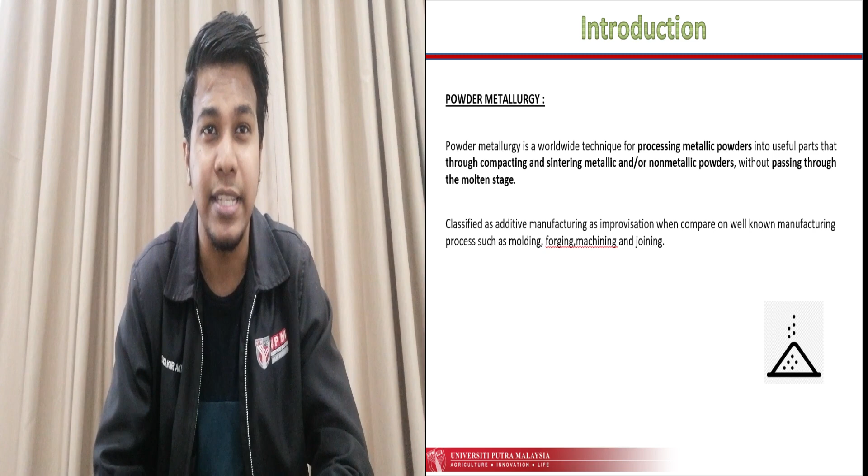Introduction. There are many manufacturing processes in the world, but powder metallurgy is different from others like casting and forging, because powder metallurgy is the processing of metallic powder into a useful piece through compacting and sintering metallic and non-metallic materials without passing through a molten stage. Powder metallurgy is also known as additive manufacturing because it is improvised from other manufacturing processes.

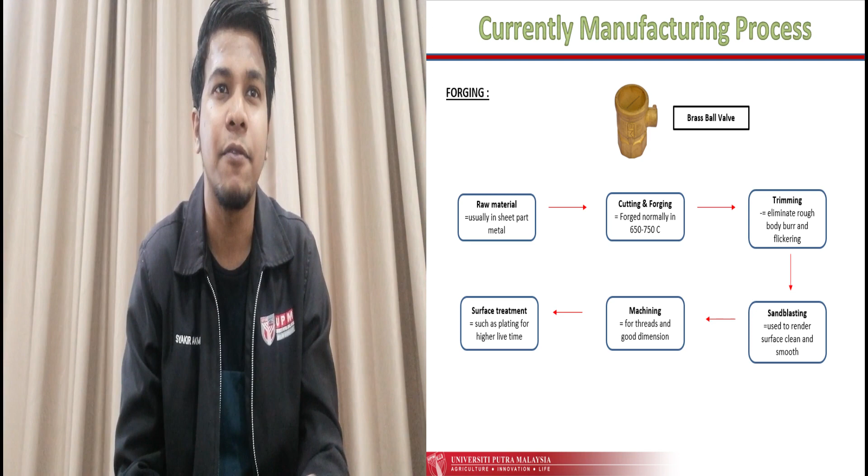Now we go to the current manufacturing process. The figure above shows the brass ball valve. The process used is forging. The first step is raw material, usually in sheet part metal. Then it undergoes cutting and forging at the desired temperature. After that, it undergoes trimming to eliminate body burr and flash. Next, it undergoes sandblasting to smooth the surface. After that, it goes to machining for threading and good dimensions, and lastly surface treatment. Plating is one of the processes for surface treatment for higher lifetime.

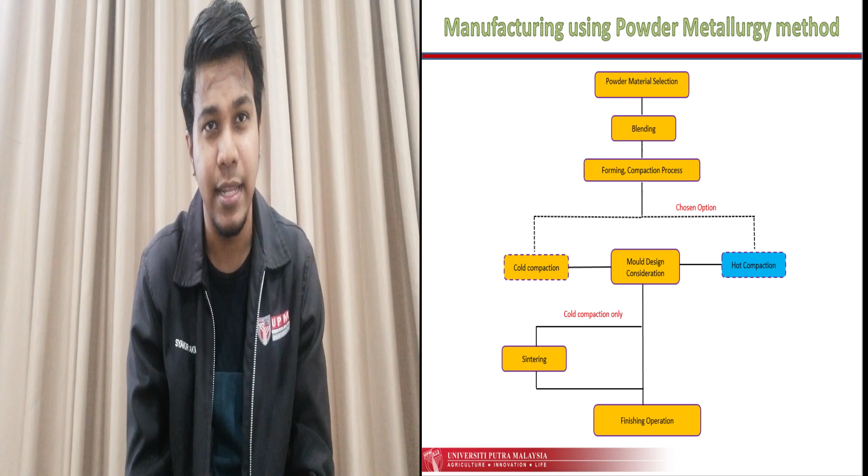Powder material selection. Usually brass alloy consists of copper metal and zinc metal. If we increase the zinc metal, it will lead to increased resistance and ductility. The color will also change from red to yellow, so if it goes more yellow, there is more zinc added.

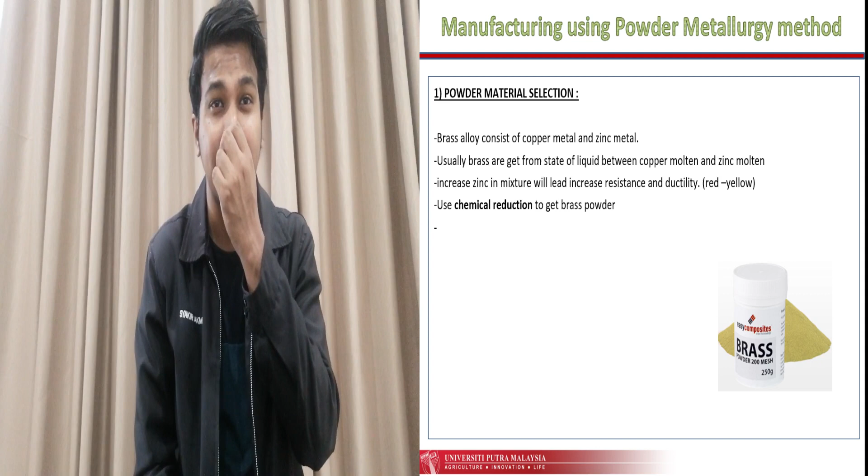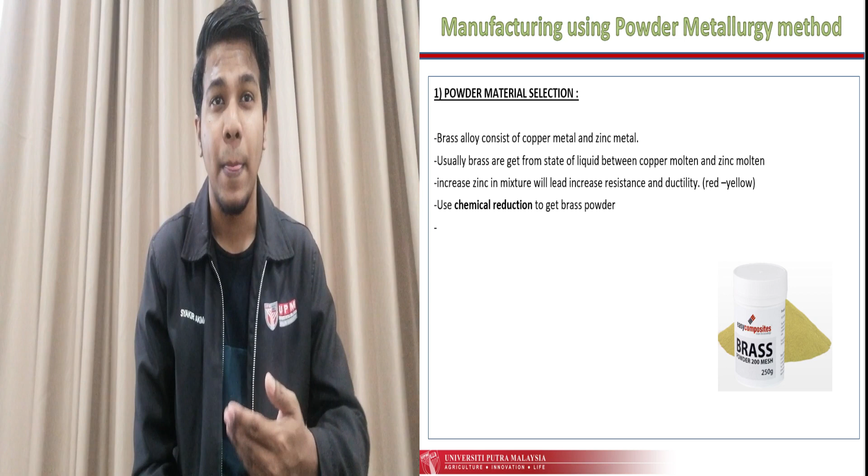Before this, to get the brass, there were additions in liquid state of copper molten and zinc molten, so we get the brass. Nowadays we want to get the brass powder. So to produce brass powder, there are suggestions to undergo chemical reduction to get brass powder. This is the flow of the chemical reduction process.

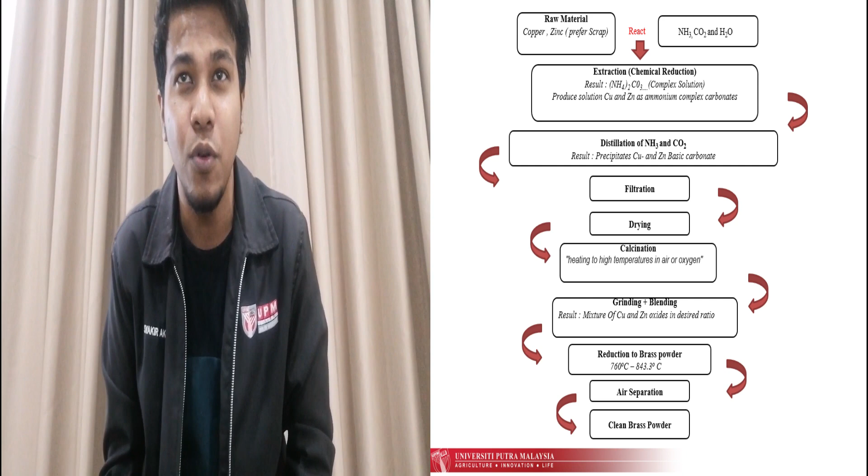Raw material consists of copper and zinc. It reacts with NH3, CO2 and H2O, then undergoes the extraction process. The result is we get (NH4)2CO3 complex solutions. Complex solutions - when we talk about complex solutions, they are the mixture of Cu and Zn in the mixture.

After that, it undergoes the distillation process of NH3 and CO2. The result is we get the precipitate of Cu and Zn. Next, it undergoes filtration, then drying, then calcination. Calcination - the material is heated at high temperature in air or oxygen. After that, undergo grinding and blending, so the result is we get the desired ratio for Cu and Zn.

Next, reduction to brass powder. We heat from 760 degrees Celsius up to 843.3 degrees Celsius - this is the ratio to heat the powder. Then we go to air separation, and lastly we can get the clean brass powder.

Secondly, we move to the blending process. The purpose of the blending process is to make sure the brass powder is in a homogeneous state. I choose the rotating double cone machine because it has a biconical drum, and it also has two functions for the machine.

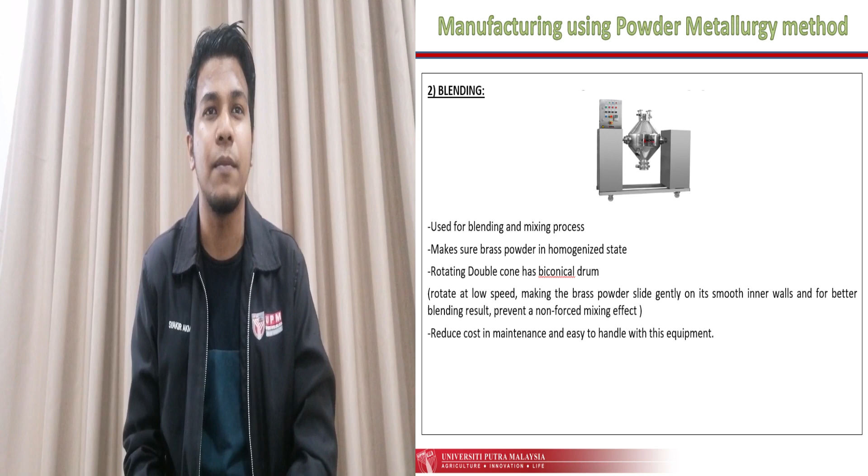It can be a blending and mixing process. The flow of the machine: first it rotates at low speeds, making the brass powder slide gently on its smooth inner walls. This gives better blending results. Another reason I chose this machine is because it can reduce maintenance cost and is easy to handle.

We move to the compaction or forming process. There are many compaction and forming processes such as rolling, extrusion, pressing, and cold isostatic pressing (CIP). For making the brass ball valve, I chose cold isostatic pressing because it helps improve density distribution by reducing friction between the particles and the die.

If I chose just single pressing instead of double active pressing, the result would show non-uniform density distribution, so the final product would not have enough strength.

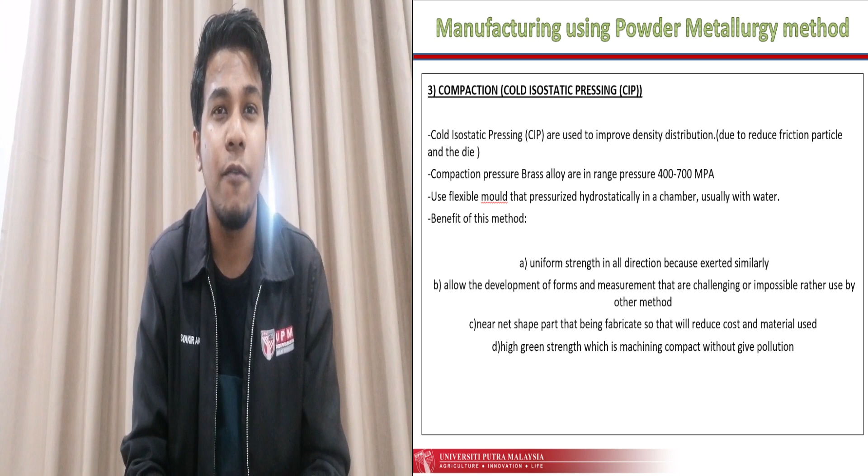After that, we use CIP. It has a range of pressure that must act on it, between 400 and 700 MPa. The unique aspect of this process is that it uses a flexible mold, which is pressurized hydrostatically.

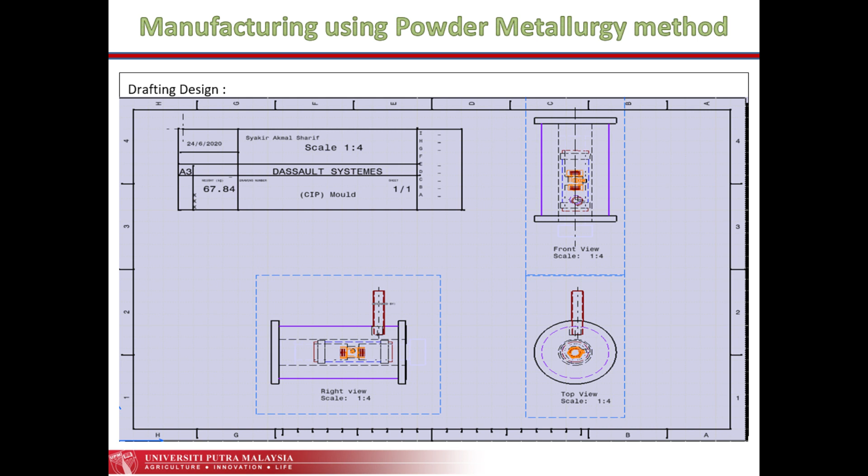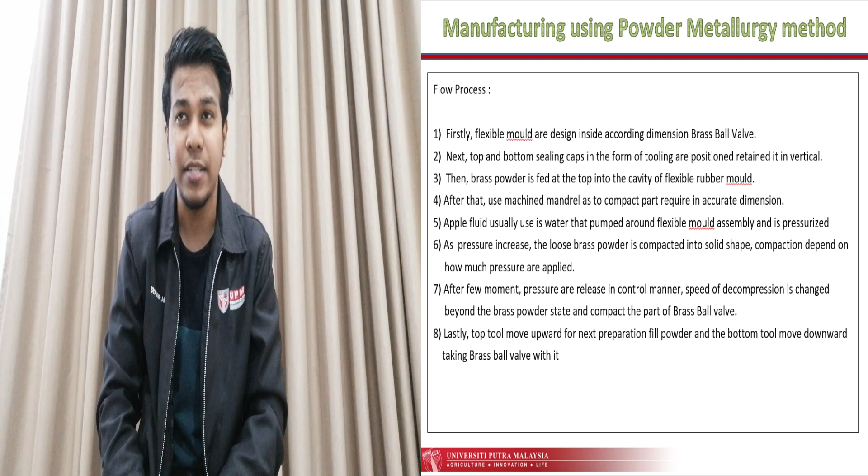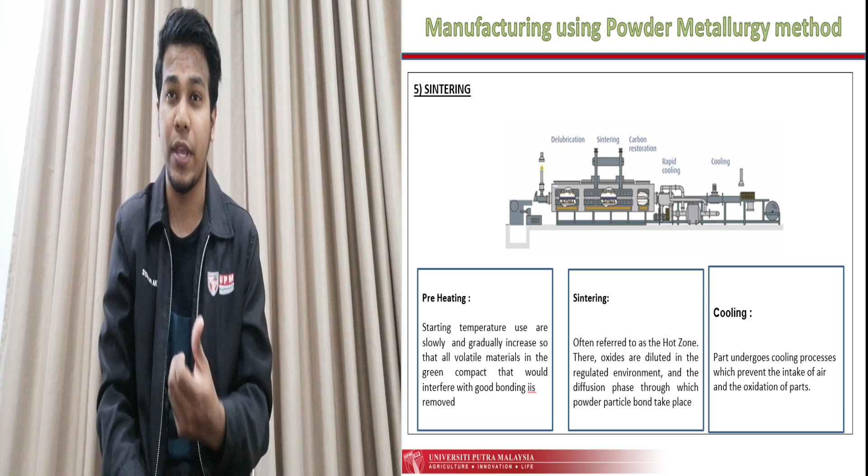After the compaction process, we go through the sintering process. It has 3 stages: preheating, sintering, and cooling. Why do we do sintering? This is because the product of the compaction process is known as a green compact, which is a little brittle. So to give it higher strength, we must heat it through sintering to allow the bonds to pack together, which makes the product stronger.

Finally, we go through the post-sintering finishing operations for better final products. There are 3 suitable methods for the brass ball valve. First is infiltration: whenever there are pores in our parts, we can fill them with another metal that has a lower melting point. Second is plating, used to cover the surface. And lastly, machining, for making the internal and external parts accurate, such as threading or cutting as needed.

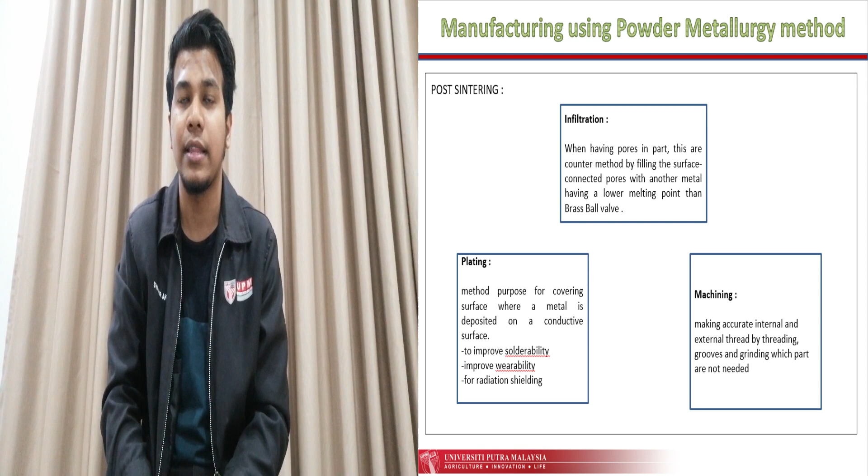Every manufacturing process has its advantages and disadvantages. But for CIP in the powder metallurgy process, the advantages outweigh the disadvantages. First, raw material can be minimized because production is near net shape. Second, it can minimize post-sintering processes like machining, since the product is usually near net shape. Third, parts with porosity can be repaired or countered by the infiltration process. And lastly, it can produce complex and unique shapes.

For disadvantages: first, only small production volumes can be done annually. Second, slower speeds for producing the products. Lastly, sintering must be done because the compaction process produces a green, brittle product, and to achieve higher strength we must sinter it.

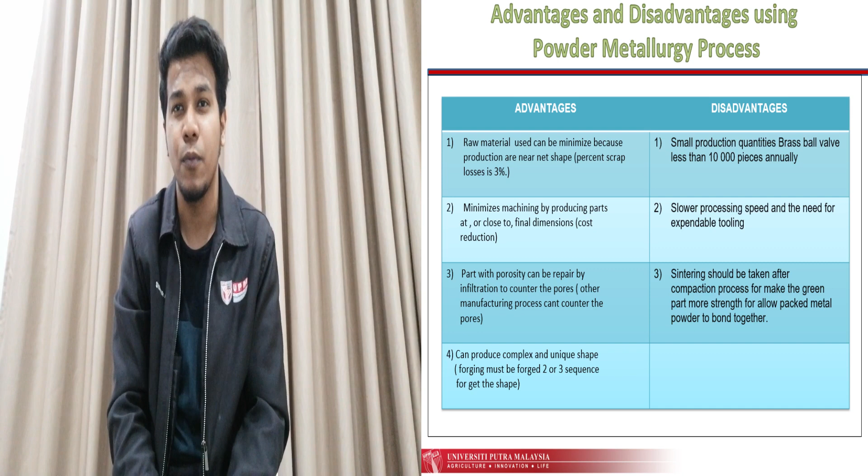In conclusion, the powder metallurgy process gives a good impact for producing parts. This additive manufacturing process should be practically adopted worldwide to continue producing varied products. My final word: the brass ball valve should be made using the powder metallurgy process as an additive process, rather than forging and casting. Thank you.